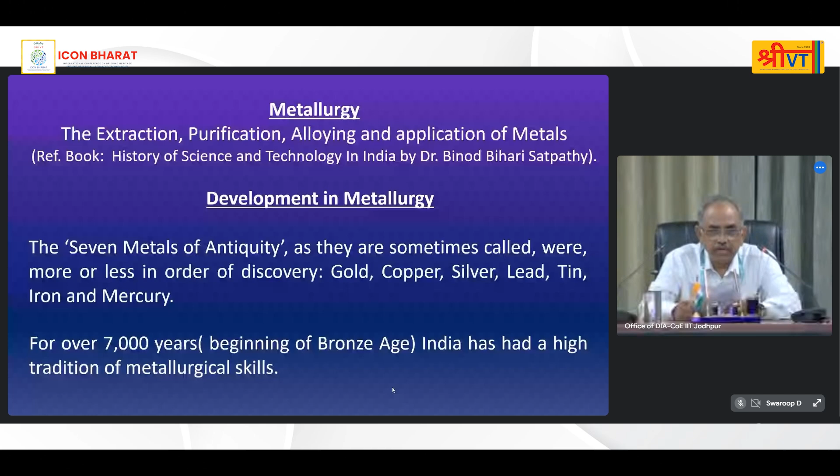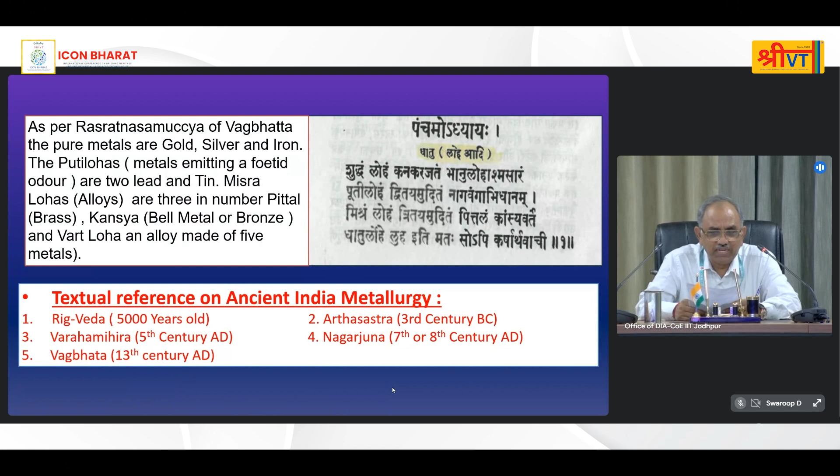So metal has played a very useful role in human civilization. In fact, we were the leaders. If you see our ancient texts, Rig Veda and later Vedas, Rasaratna Samuccaya, Nagarjuna, Vagbhatta, there are very vivid descriptions of metals, with mentions of 7 metals.

If you see copper metallurgy in ancient India, it started with the Harappan civilization. We were aware of how to extract copper from ore, combine it with tin to make bronze, and shape copper or bronze into different forms by forging, sinking, raising, cold work, annealing, riveting, lapping and joining.

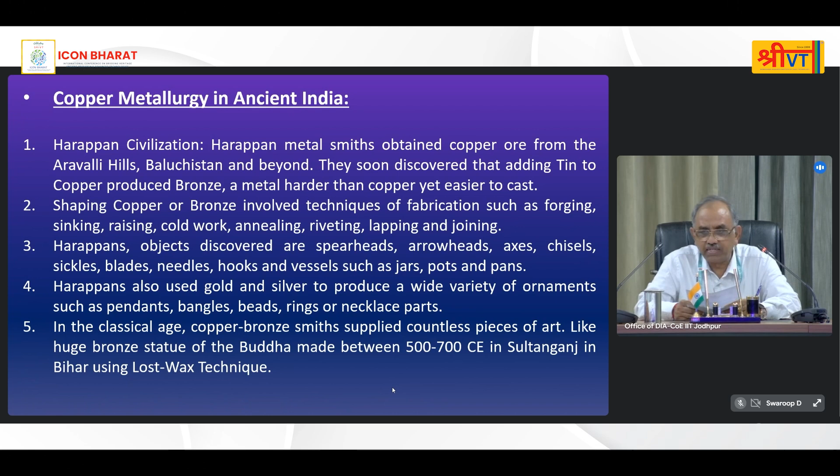Harappan objects discovered include spearheads, arrowheads, axes, chisels, sickles, blades, needles, hooks and vessels such as jars, pots and pans. Harappans also used gold and silver to produce a wide variety of ornaments such as pendants, bangles, beads, rings and necklace parts. In the classical age, copper and bronze smiths supplied countless pieces of art like the huge bronze statue of Buddha made between 500 and 700 CE in Sultanganj, Bihar, using the lost wax technique.

We were also masters of gold and silver metal, mainly used for ornaments and jewelry. In Karnataka, in the Maski region, there is the deepest mine, dating to the mid-first millennium BC. And we were masters of iron metallurgy in ancient India.

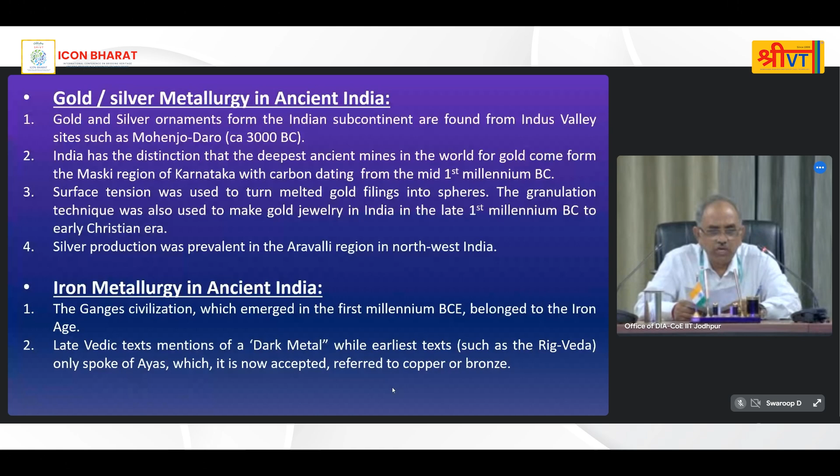In the Ganges civilization which emerged, Vedic texts mention a dark metal, while the earliest texts such as the Rig Veda only spoke of a metal now accepted as referring to copper or bronze. Wootz steel is from India, and we were masters of making it - basically iron containing a high proportion of carbon.

India was a major innovator of wootz steel, which was used to make swords, produced in South India from about 300 BC. A second advanced iron technology is the one used in the Delhi iron pillar, consisting of about 6 tons of wrought iron. This technology is such that, in spite of around 1600 years of exposure to weather, it has not rusted.

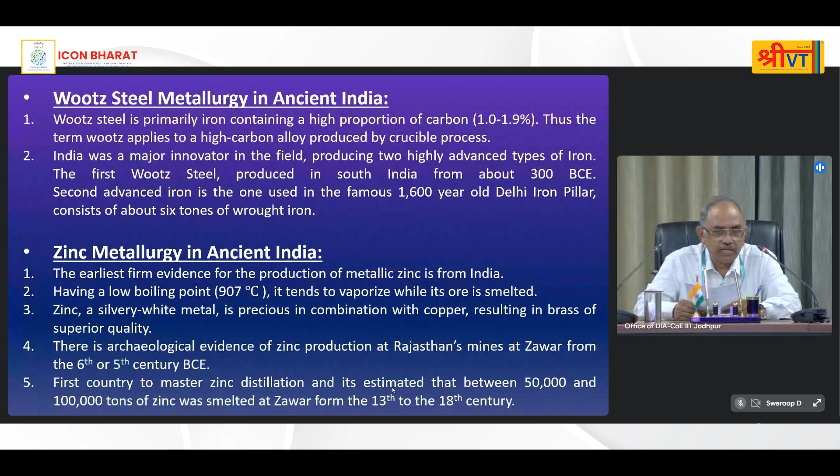We were also innovators in zinc metallurgy, and we were the first to produce zinc using the reverse distillation process, in the Zawar region of Rajasthan, where we have found these references.

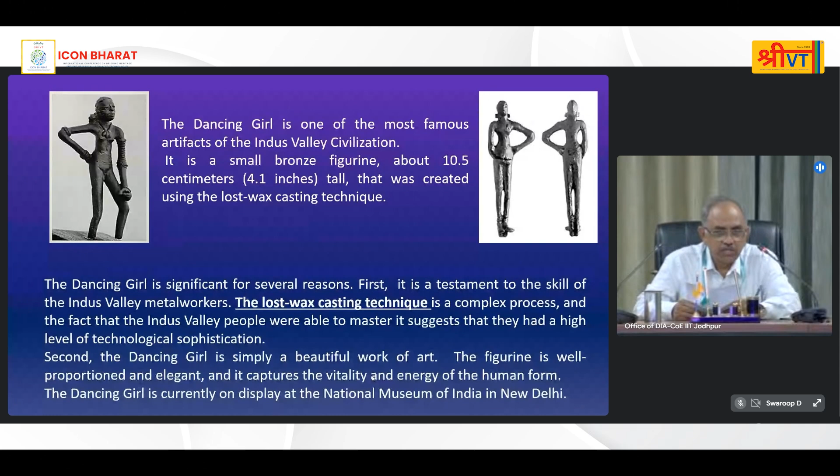We can see hundreds of such artifacts and statues produced by ancient Indians, using casting techniques where the mold was prepared with wax, then melted and taken out, and then the metal was cast, cooled and finished.

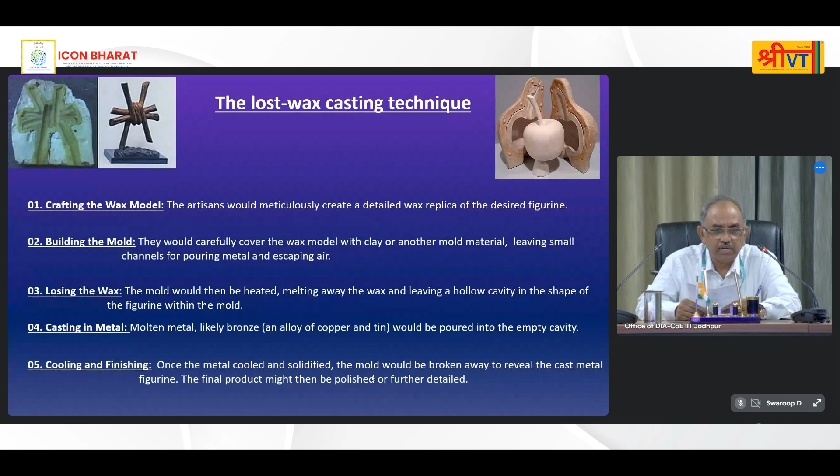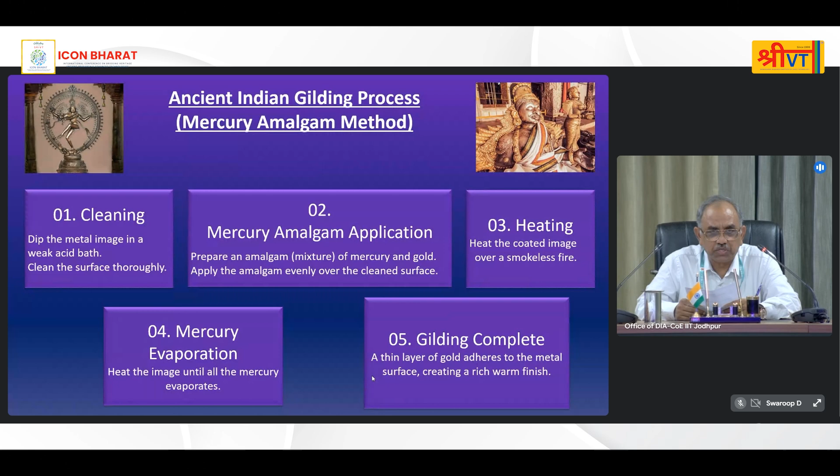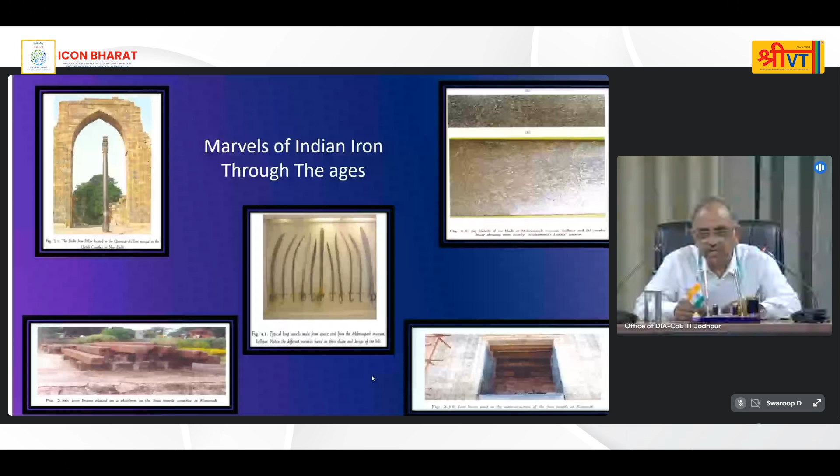These are some of the monuments recovered in archaeological excavations - Jagannath temples, and the Damascus sword made in medieval India.

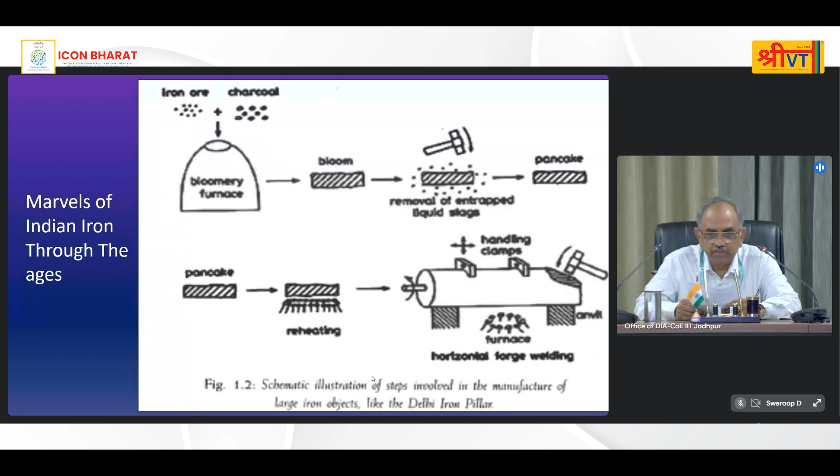Our texts mention 8 metallic ores - Abrak, Vikrantmadi, Sonamaki, Vimla, Shilajit, Neelathota - used to extract different metals. The processes used by ancient Indians to prepare the iron pillars and other instruments are described in the Rasaratnakar, which describes around 34 instruments and how to make and use them in various metallurgical processes.

Now, for 3000 years this was the knowledge, until around the 17th, 18th, and 19th century in Europe, when a quantum revolution took place, and many metals were discovered like aluminum, titanium, uranium, tungsten - and I will cover them in my next slides.

And the metallurgy, which was a tradition and art in the ancient world, has been converted into science and technology. At that time, various industrial processes for bulk production were developed, like blast furnaces and other furnaces, railways, household and agriculture equipment.

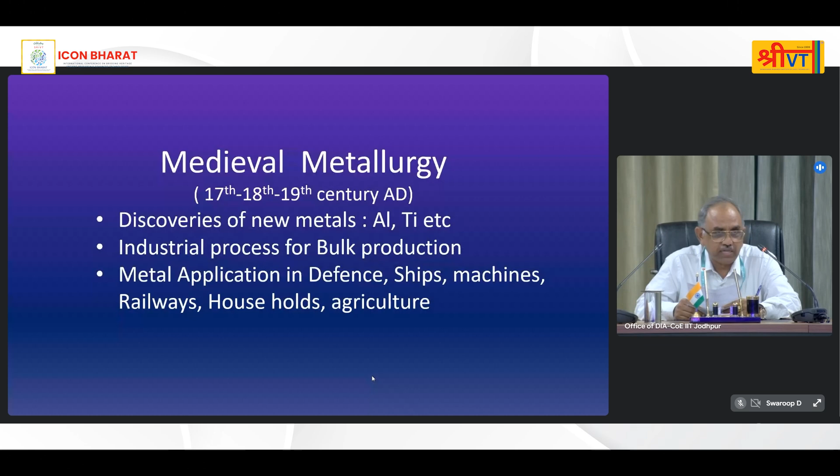The most important discovery in medieval times was aluminium, which is abundant in the earth's crust. In ancient times, the knowledge of how to extract and reduce it was not there because it cannot be easily reduced. It was discovered by a Danish scientist, and then in 1886 the Hall process was developed to separate this metal from oxygen. It is abundant in the earth and it is a light metal.

If you see the strength versus density ratio, the specific strength, it has very high strength, and this finds very wide application in aerospace, as foils, as wire drawing, as corrosion resistance material, and in various other applications, replacing many applications of iron and steel.

The other important discovery was that of titanium. Again, this is very highly abundant in nature, and strength-wise, it is competing with steels, and density-wise, it is lighter than steels. In many processes, it is again replacing steel, but it is slightly costlier today, and we hope that by some time its cost will come down.

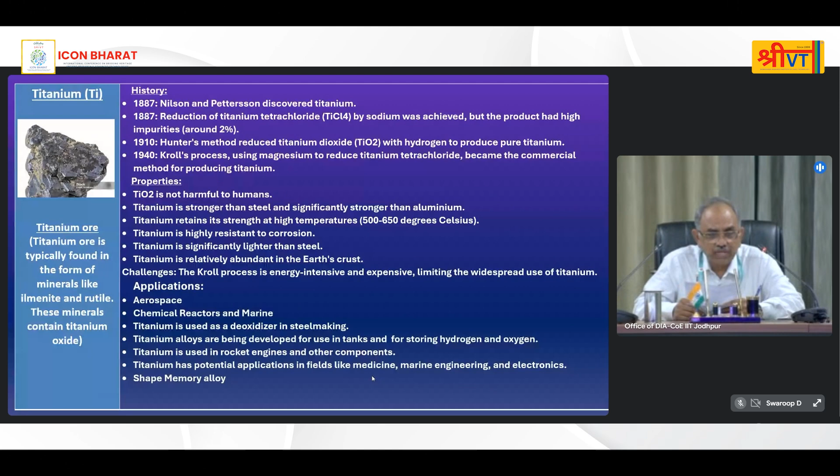The other materials are chromium, which is used in production of stainless steels, and ferrochrome alloy is a key ingredient in stainless steel. Then there are other applications of chromium, especially in high temperature materials, and then high corrosion resistance materials.

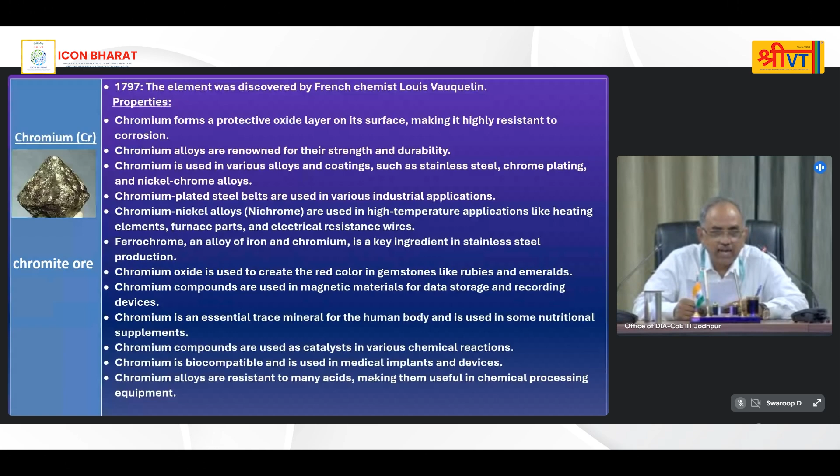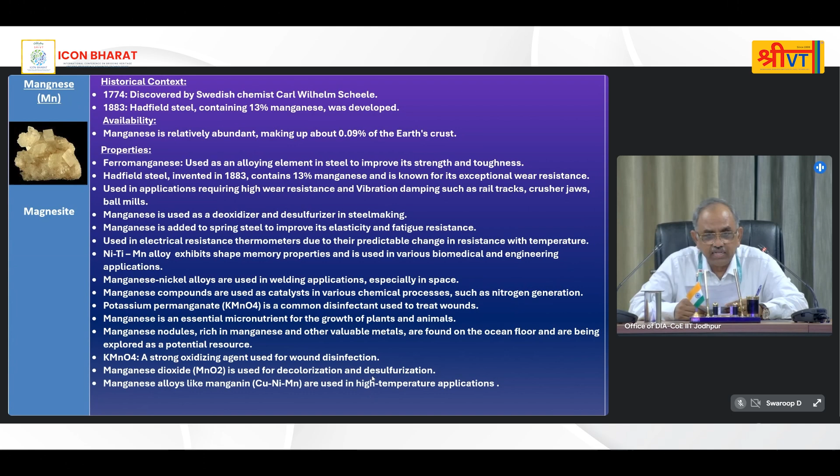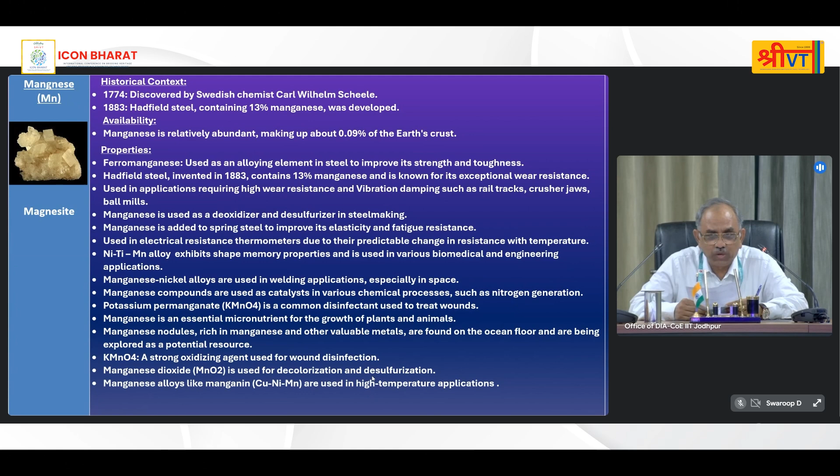Humankind, using manganese, is producing various kinds of steel alloys, and it is being utilized as an essential catalyst. The main use of this is as an alloying element, and Hadfield steel is one application where rail tracks are fabricated using these metals. It is highly damping in nature of vibrations, and it is very hard and tough.

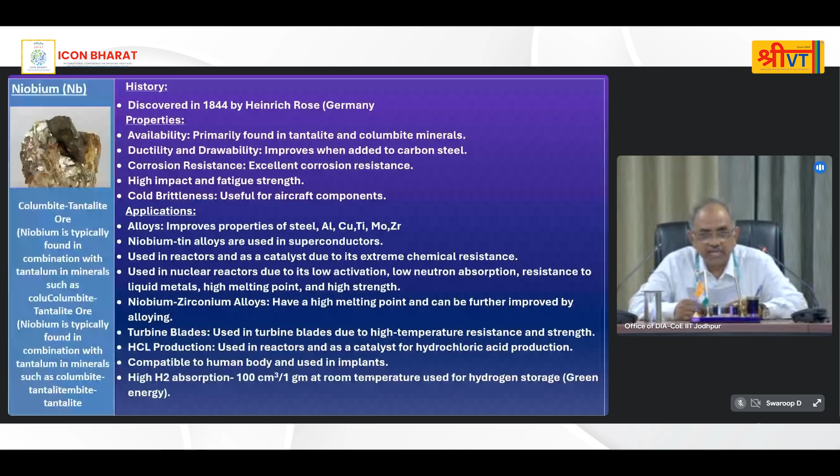Nickel is another metal which is used mainly for coatings and platings, especially monel, nichrome, German silver, spring steels, and nickel-based alloys in thermocouples, inconel, nickel-titanium alloys, shape memory alloys. So this is highly useful. It was discovered in 1751 by a Swedish chemist.

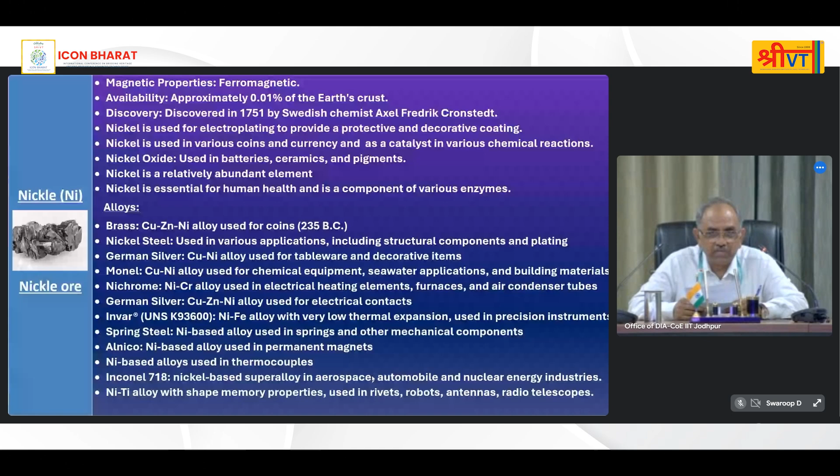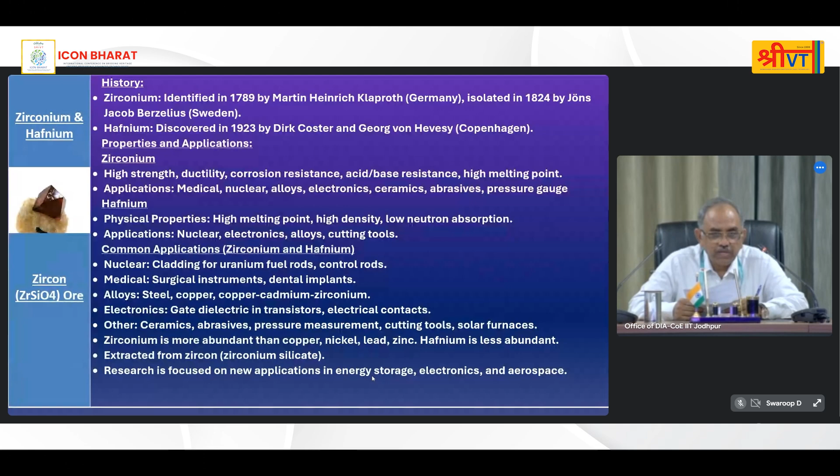Zirconium - these are materials used in nuclear applications and medical surgical instruments, dental implants, electronics, and many other modern day applications.

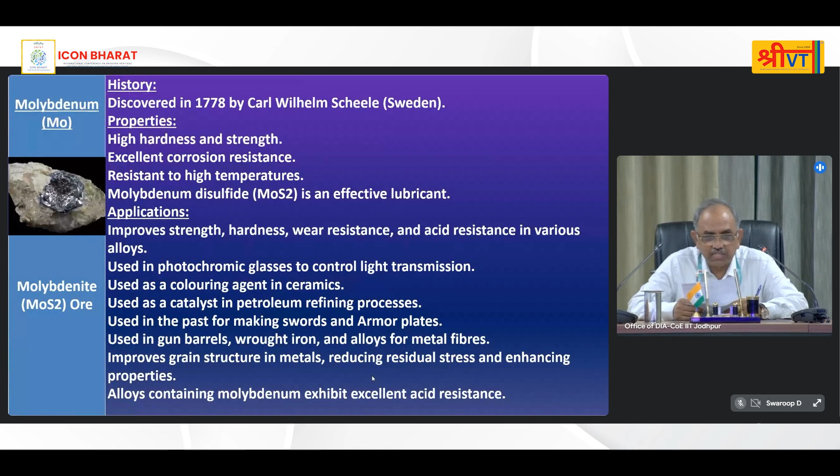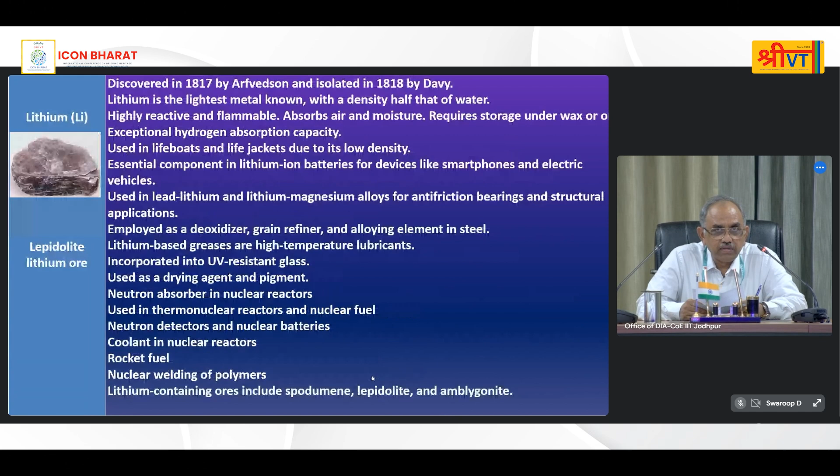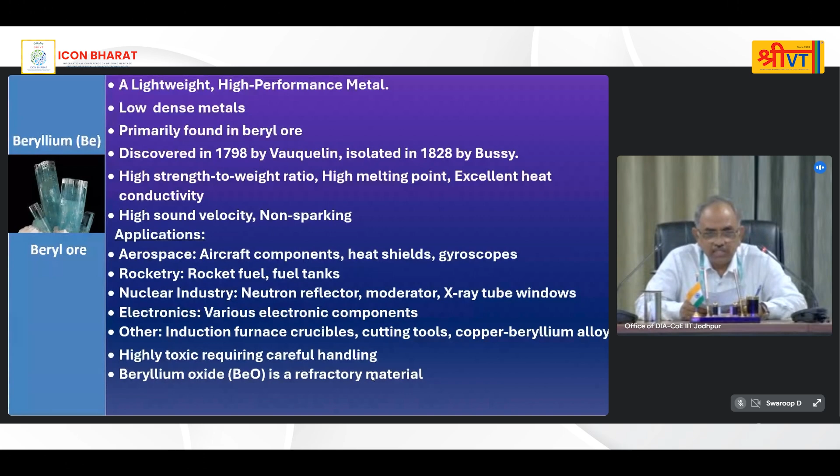Lithium has another application as a radioisotope in nuclear reactors, lithium-6 fusion reactions, and also as a nuclear neutron detector. Another metal of importance for nuclear applications is beryllium - used in rocketry, nuclear industry, electronics, and other refractory applications as a refractory material.

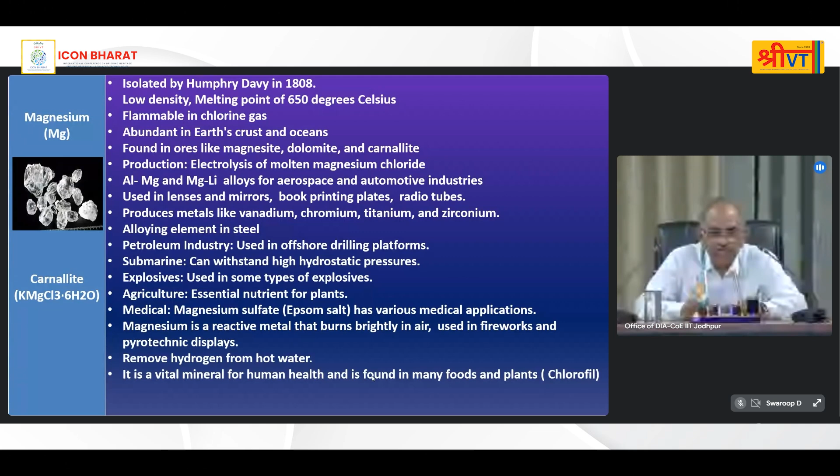Magnesium is another metal, the brother of aluminum, and magnesium is very useful. Many other metals are of importance. Its alloys with aluminum are being utilized in aero applications as they are light, and in the strength-to-density ratio they are competitive - better than steel components.

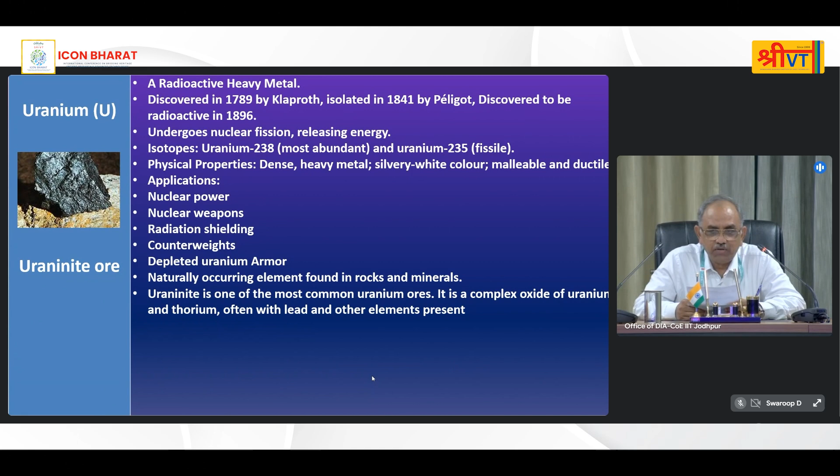And it is a metal which is highly controlled in the world, and this is used as a nuclear fuel as well as radiation shielding and nuclear weapons. It is a strategic element which is controlled by different international treaties.

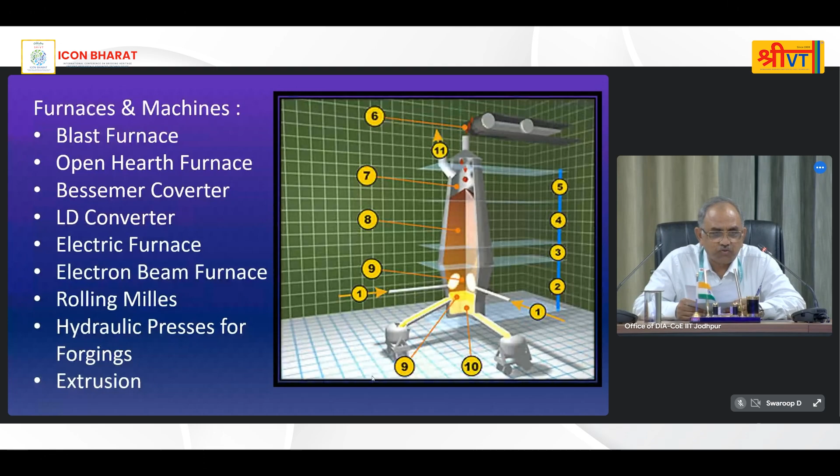Coming to modern day metallurgy science and engineering, which is the extension of medieval metallurgy. Various alloys I have discussed with you are finding various applications now in missiles, submarines, nuclear, electronics, medicines, robotics, radars, and automobiles. And we have also developed electron microscope and XRD studies.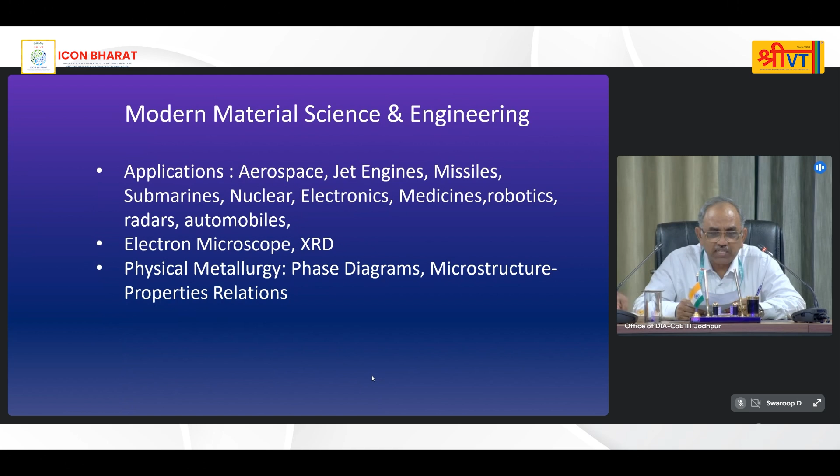And physical metallurgy has started, where phase diagrams and microstructure property relations have been established. Now, depending upon the applications, we can develop an alloy. In fact, we can design an alloy, simulate its properties, and then develop it.

So, current status: if we see metals and alloys, there are iron-carbon alloy systems where steels and cast irons are there, then alloy steels are there. Other than iron-carbon steels, we have non-ferrous materials like aluminum, chromium, copper, magnesium, nickel, zinc, and silicon.

We have stainless steels, particularly used where resistance to corrosion is important. Aluminum alloys and magnesium alloys are commonly used when a lightweight strong part is required, such as for non-magnetic applications. Nickel-based super alloys like Inconel are used in high temperature applications such as gas turbines, turbochargers, pressure vessels, and heat exchangers for extremely high temperature.

Single crystal alloys are used to minimize creep. In modern electronics, high purity single crystal silicon is essential for metal oxide semiconductor transistors and integrated circuits. With nanomaterials, by reducing the size of the metal to nano scale, various innovative properties are developed and being developed for application in robotics and space construction.

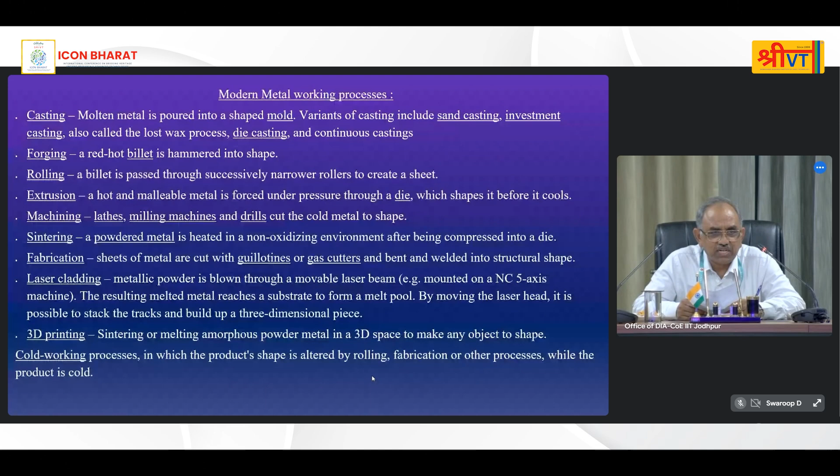And we also work on modern metalworking processes: casting, forging, rolling, extrusion, machining, sintering, fabrication by gas cutting, and many more.

We have also mastered heat treatment processes, wherein by changing microstructures through different thermomechanical treatments, we do precipitation hardening, annealing, quenching, tempering, and in surface treatments, carburizing and nitriding are very well established processes. Further improvements include thermal spraying using HVOF, plasma spray, flame spray, arc spray, metallizing, electroplating, and electroless deposition for surface treatments.

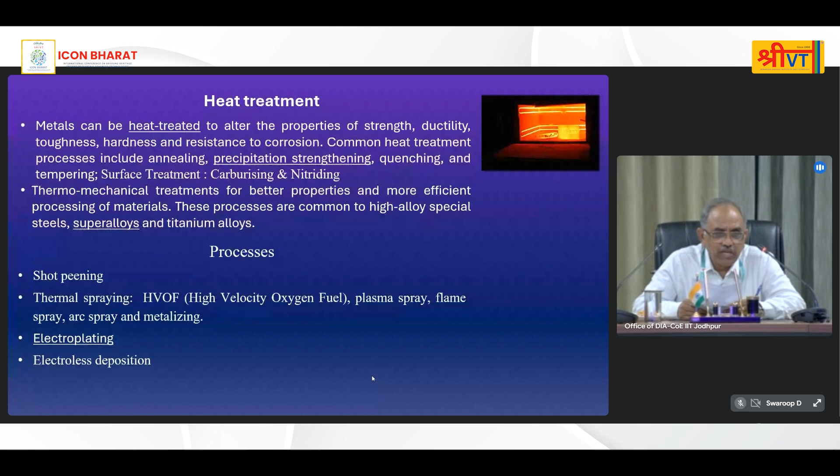So metallurgy has moved from a very raw application, like the copper form available in meteorites, to a well-defined way of extracting metals from ores, making alloys through various processes, and then giving them various treatments to achieve the desired properties.

Now I will cover some part of my work which I have done for defense. These are the chaff materials.

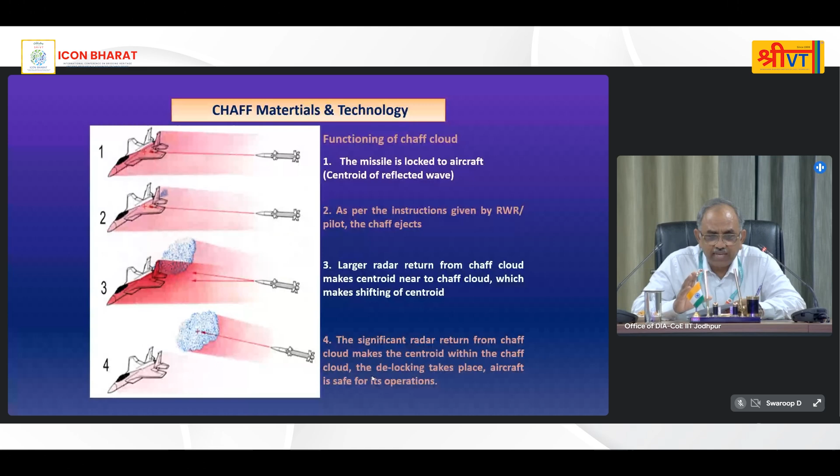So when engaged by a missile, an aircraft gets a signal, and to safeguard itself, it emits very fine metal fibers called microwave dipoles. Millions and billions of these dipoles are ejected by the aircraft, creating something like a pseudo-aircraft. In the radar, it is seen as giving a stronger signal than the actual aircraft, so the missile gets diverted to it and the aircraft survives.

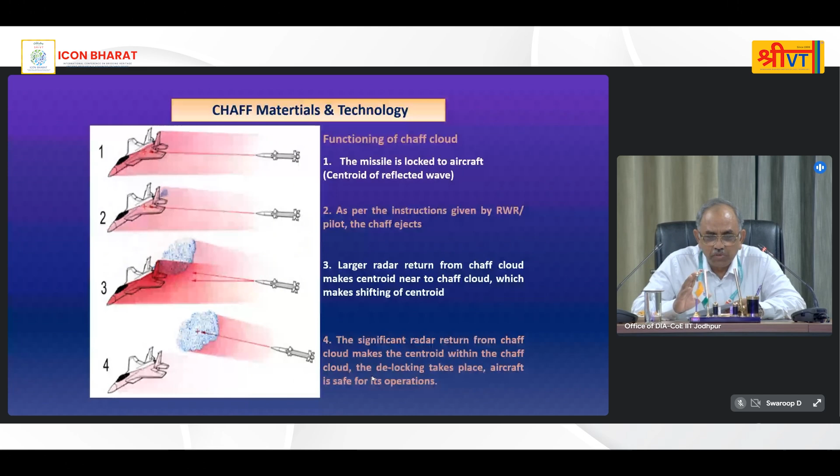Not only have we developed materials which are better than the imported materials, but we have also developed testing, and it is found to be very highly useful.

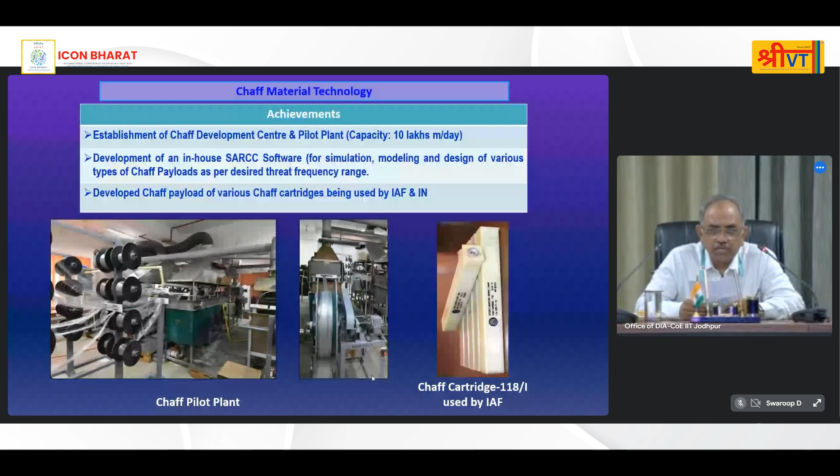These are the innovative processes we have used, by dissolving and reducing a 125 micron diameter fiber to less than 25 micron diameter in a single pass, with multiple fibers passed in. By this technology, we have established a plant facility producing around 10 lakh meters per day.

This is a successful technology where an aluminum wire of 125 micron diameter is passed through a chemical bath, and then a surface treatment process is given to it for smoothness.

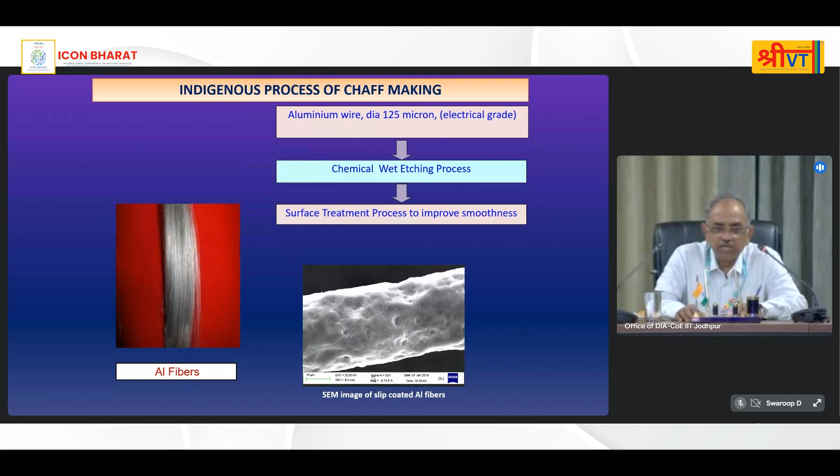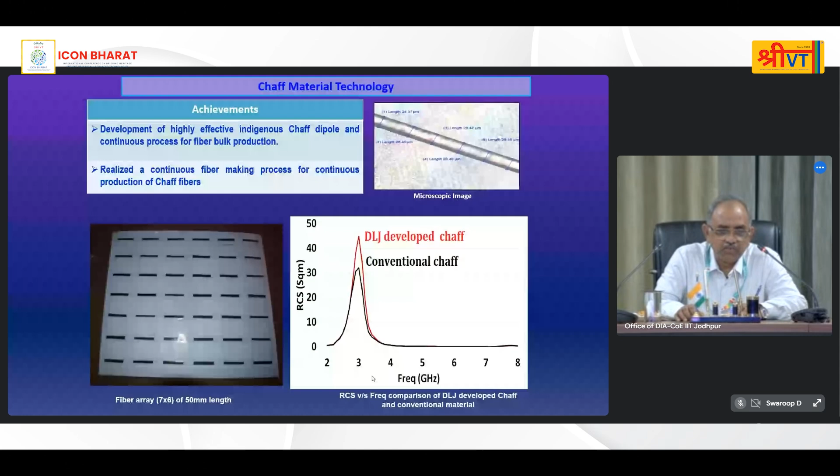So this is what I wanted to cover, that metallurgy and metals have proved very useful, and their use is going to continue in different ways.